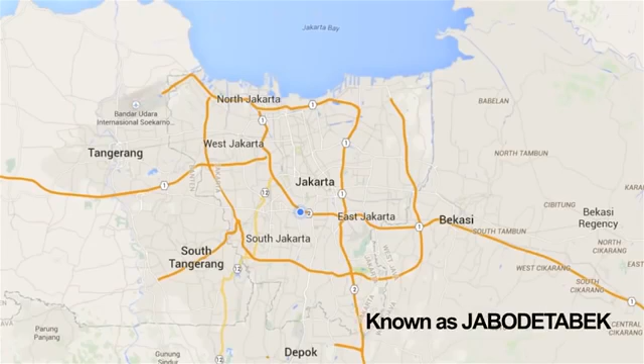Known as Jabodetabek, a name formed by combining the initial syllables of Jakarta, Bogor, Depok, Tangerang, and Bekasi, it is the second largest in the world, yet the metropolis's suburbs still continue beyond it. With 28 million people in the metropolitan area, nearly 10 million vehicles in daily use, and a limited rapid transit system, Jakarta is strained by transportation problems.

The alternative solution to Jakarta's transportation problem shall be providing mass rapid transit that is environmentally friendly and powered by electricity. By adopting the system utilized in other countries such as Singapore and Japan, the Government of DKI Jakarta established the organization that is fully responsible for all activities starting from the engineering service, construction through operations and maintenance. The organization is PT Mass Rapid Transit Jakarta.

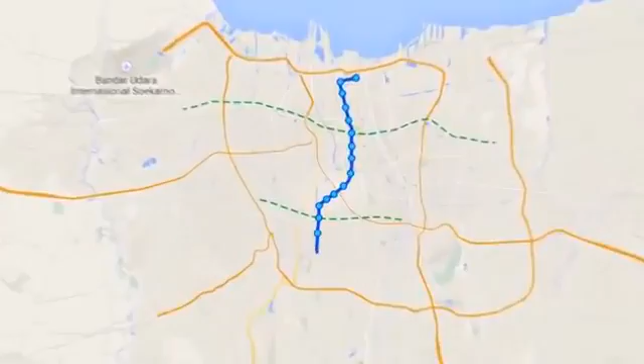Rail-based MRT Jakarta will stretch over 110.8 km of Jakarta roads, consisting of a South-North corridor of about 23.8 km and an East-West corridor of about 87 km. This project is funded through a step loan by JICA and includes the first subway line in Indonesia.

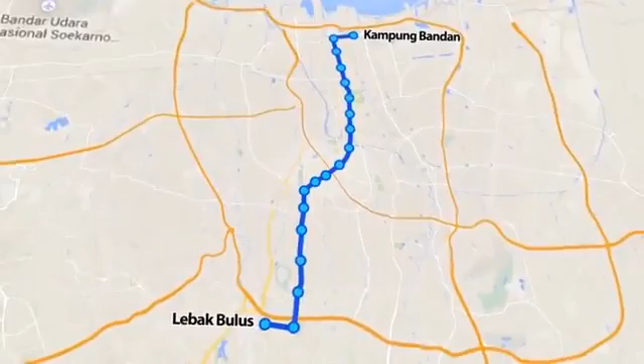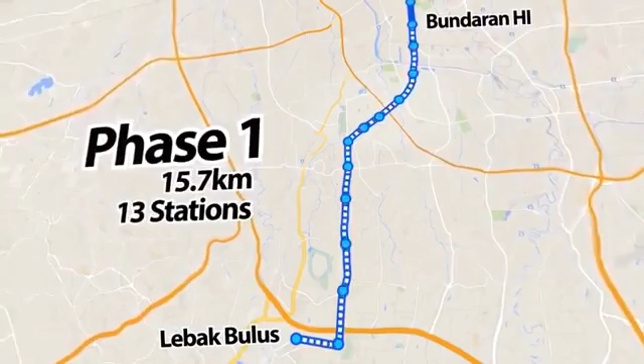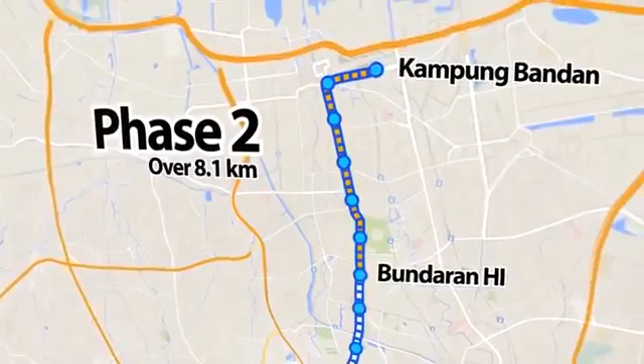The construction of the South-North corridor that stretches from Lebak Bulus to Kampung Bandan will be carried out in 2 phases. Phase 1 will connect Lebak Bulus with Bundaran HI over a 15.7 km railway with 13 stations, 7 elevated stations and 6 underground stations, which is targeted to operate by 2018. Phase 2 will expand the South-North corridor from Bundaran HI to Kampung Bandan over an 8.1 km railway, whose construction will have been initiated before Stage 1 operates.

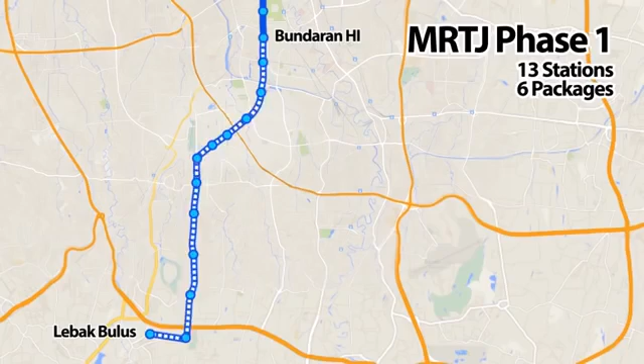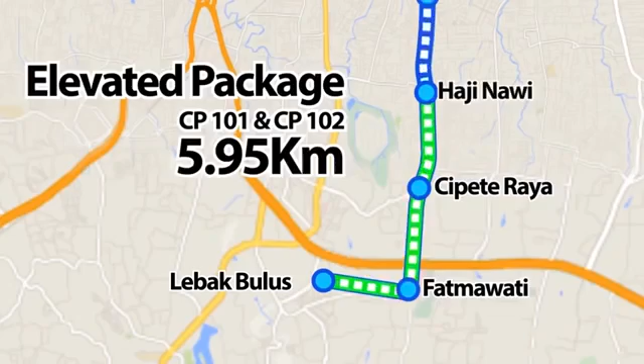The construction of MRT-J Phase 1, which includes 13 stations and 6 packages, has been underway since August 2013. Elevated packages CP101 and CP102 consist of Lebak Bulus, Fatmawati, and Cipete Raya stations along 5.95 km. Elevated package CP103 consists of Haji Nawi, Blok A, Blok M, and Sisingamangaraja stations along 3.84 km.

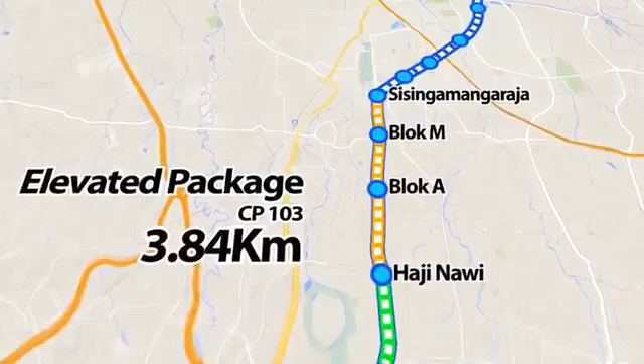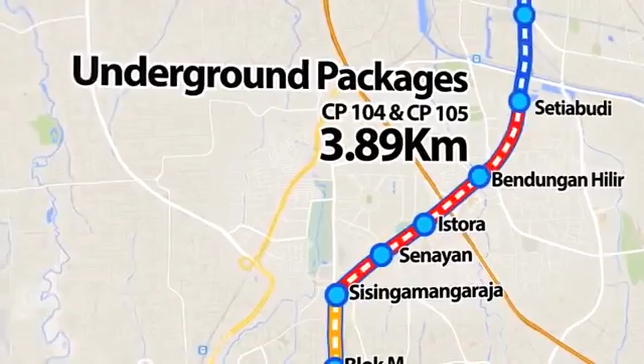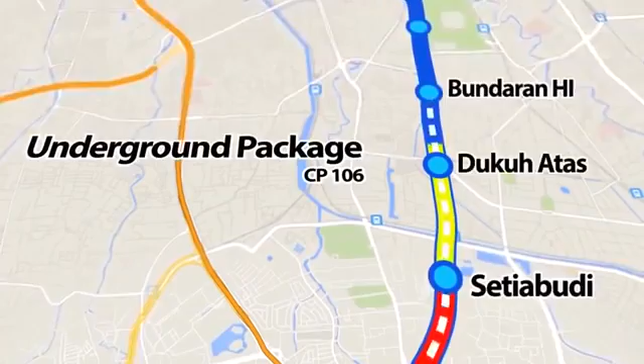Underground packages CP104 and CP105, which consist of the transition area, Senayan, Istora, Bendungan Hilir, and Setiabudi stations along 3.89 km, are carried out by Shimizu Obayashi Corporation from Japan, and Wika and Jaya Konstruksi from Indonesia. Underground package CP106 consists of Dukuh Atas and Bundaran HI stations along 2.02 km.

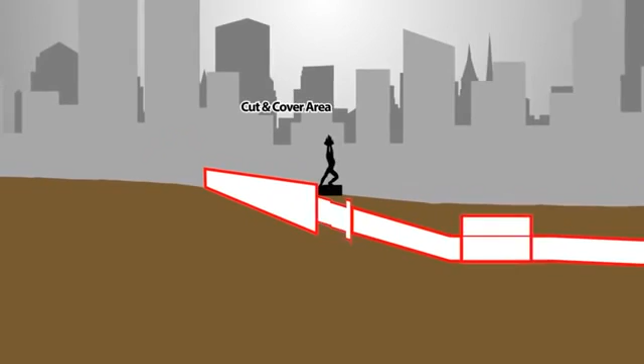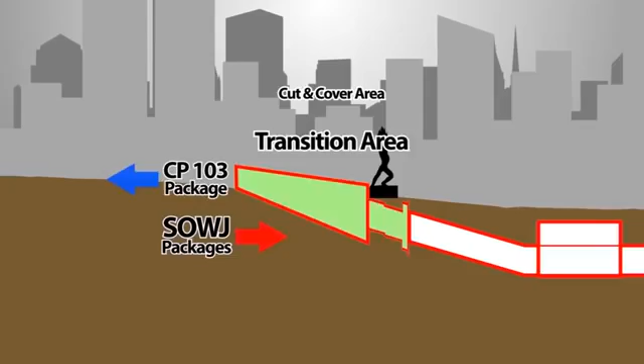SOWJ is the abbreviation of the Shimizu Obayashi Wika and Jaya Konstruksi joint venture, which constructs the CP104 and CP105 packages. Those packages are underground packages that include the transition area, station and tunnel construction with a total length of 3.89 km. The transition area, or cut and cover area, will be located from Sisingamangaraja Road until Bundaran Senayan along 460 meters. This area is a transition from the elevated structure of the CP103 package to the underground structure of the SOWJ packages, which will be constructed by the soldier piling method.

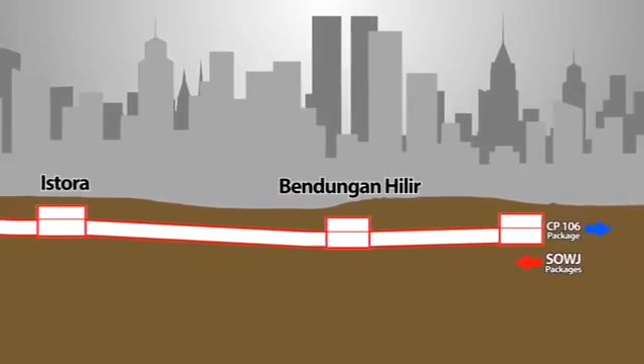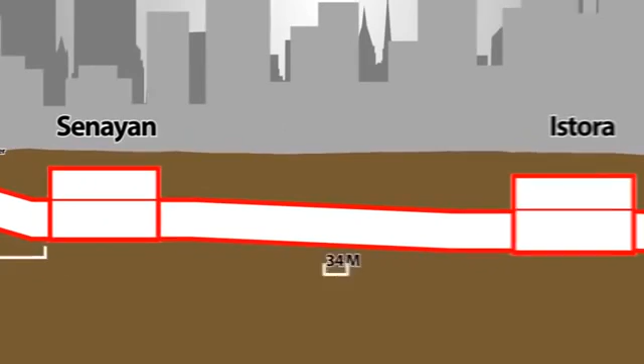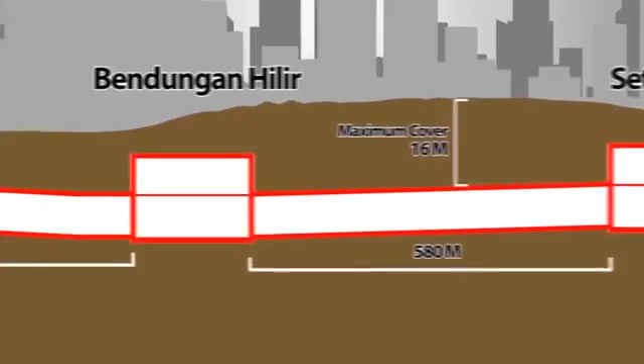There are 4 stations, Senayan, Istora, Bendungan Hilir, and Setiabudi, that will be established. The distance from cut and cover to Senayan station is 322 meters. The distance between Senayan and Istora station is 630 meters. The distance between Istora and Bendungan Hilir is 1080 meters, and from Bendungan Hilir to Setiabudi is 580 meters. The length of each station is 200 meters, except for Istora station, which will be 220 meters.

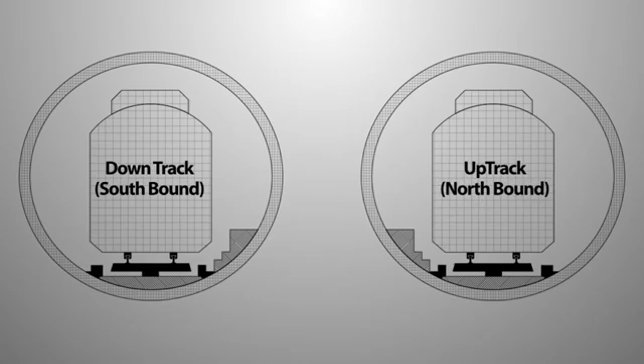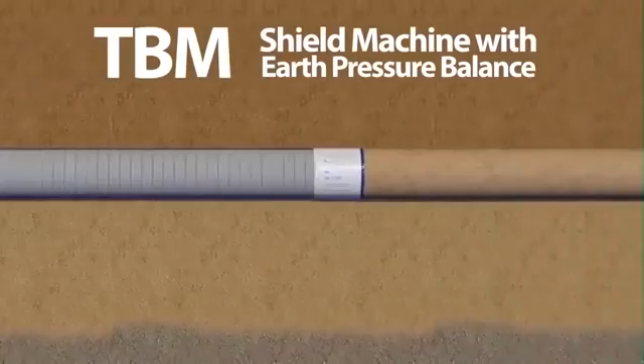The tunnel structure is for the railway of the MRT-J train. The tunnel structure consists of 2 lanes, the down track or southbound lane, and the up track or northbound lane. This facility will be constructed by tunnel boring machine, also known as TBM. The TBM that will be used is a shield machine of the earth pressure balance type. The required inner diameter of the tunnel is 6,050 millimeters. This tunnel is completed by reinforced concrete segments as the supporting lining structure.

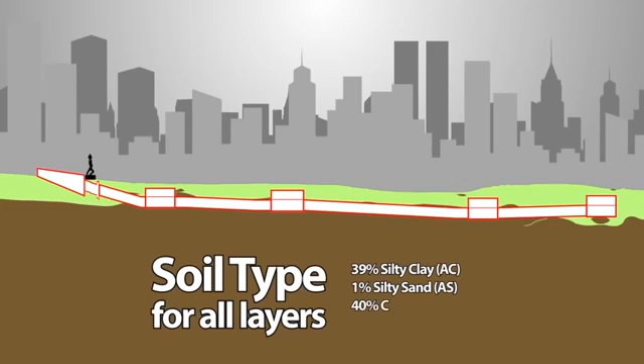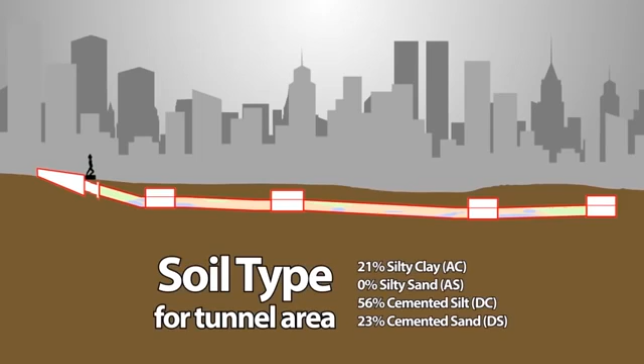According to the geotechnical report for the CP104 and CP105 project location, the tunnel alignment along Jalan Sisingamangaraja through Jalan Sudirman consists of 39% silty clay, 1% silty sand, 40% cemented silt, and 20% cemented sand soil types. This soil condition will affect the type of TBM utilized for this project. The majority soil layer passed through by the TBM is cemented silt. Due to that condition, the type of TBM selected for this project is the earth pressure balance shield machine.

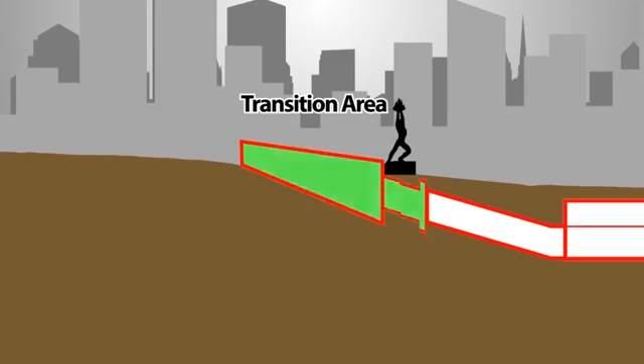The cut and cover area is located in Sisingamangaraja Road, bordering the CP103 package, until the Pemuda statue at Senayan. This area is the transition from elevated structure to underground structure. The cut and cover area is constructed using the soldier piling method. H-beams will be used as the major material of the soldier piles. Before driving the piles, the position, alignment and orientation of the piles must be established.

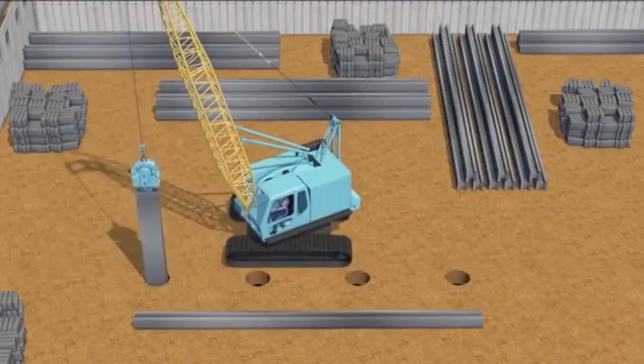Piles will then be driven by a vibrator hammer unit into the marked position. Piles shall be driven in a straight vertical position, otherwise driving will be difficult. All piles will be inspected for excessive camber or sweep. After completing the soldier piles, excavation of the first layer will be carried out, and then a temporary deck and the first waler strut will be installed.

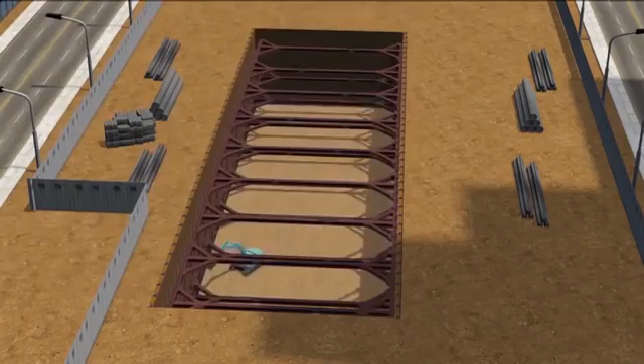Excavation of the second and third layers down to the base will be continued. The bottom layer will be completed with blinding stone and lean concrete. The base slab concreting process can then be started.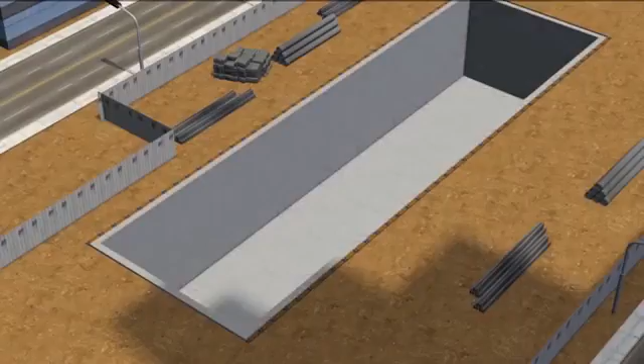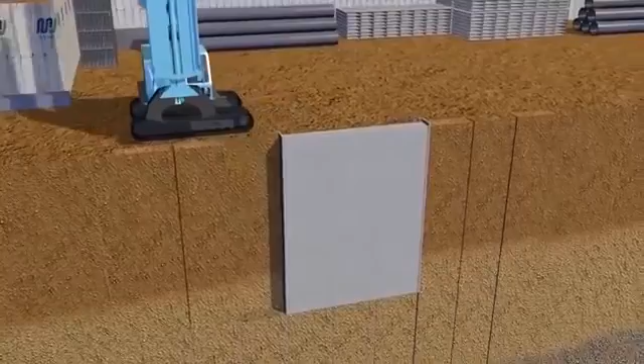The station is constructed using a top-down method. In order to retain the soil and water pressure while commencing a deep underground excavation for main station boxes, diaphragm walls will be constructed. The trench is excavated using a mechanical and hydraulic clamshell, and then a reinforcement bar cage can be lowered down into the excavated area. The next step is pouring the concrete, which is carried out by Tremie method. This cycle is repeated for all 4 sides of the station.

The diaphragm walls will function as temporary retaining walls during construction and also as a permanent retaining wall for the station structures. Before starting the excavation process, king posts must be installed as a temporary support for the roof and floor slabs. The first excavation will be conducted and followed by the casting of roof slabs. With openings around the king posts, the second excavation can be conducted.

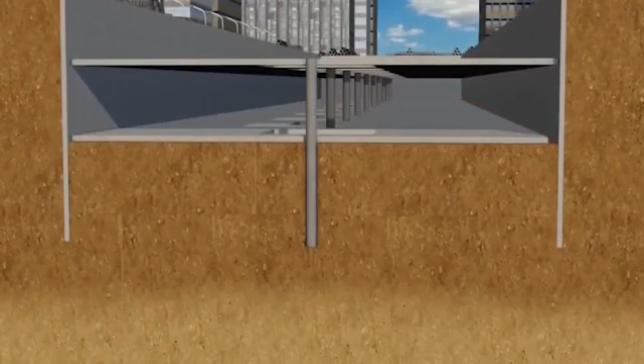After installing the concourse slab, a concourse column will be cast, and then the third excavation can be conducted. Before casting the base slab, blinding stone and lean concrete will be installed. The final process is backfilling the roof slab with soil and compacting it by grader and vibro roller.

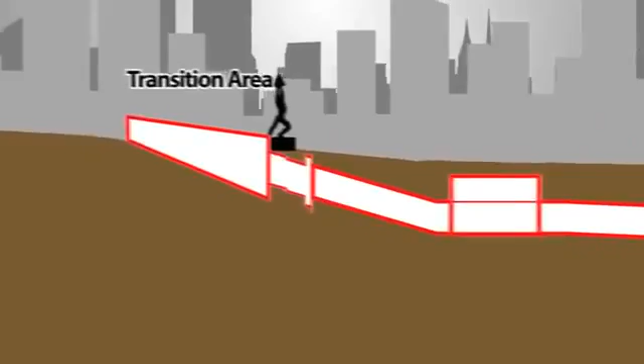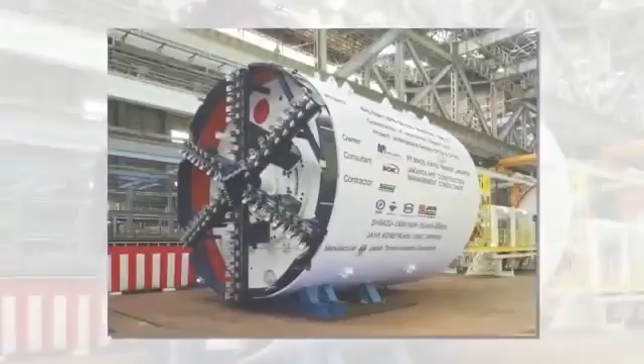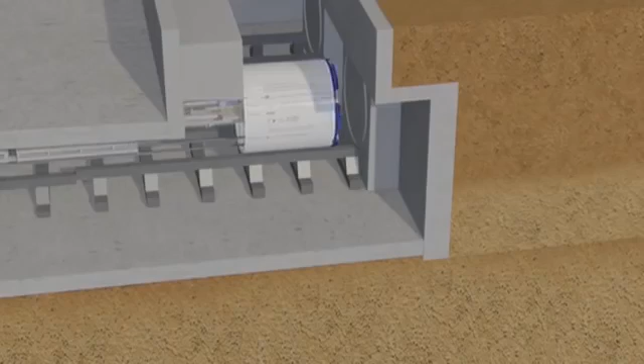The EPB shield machine is not designed as a whole complete component. Shield machine assembly is located at the launching shaft beneath the Pemuda statue, Senayan. This machine is formed by some parts which have special functions for the tunneling work. When the TBM is completely assembled, it will be positioned facing the tunnel eye seal. The TBM will then slowly proceed forward. The tunnel eye will be broken by the TBM roller cutter. The TBM will then break out of the launching shaft and enter into the ground.

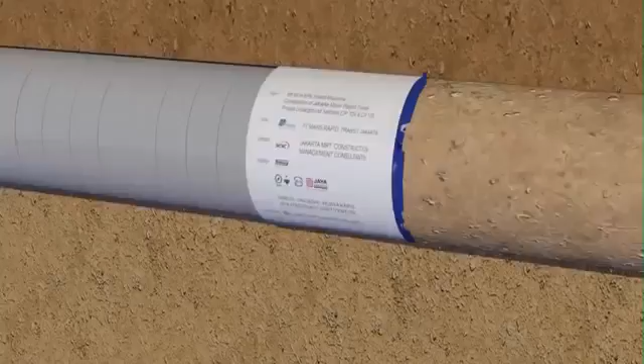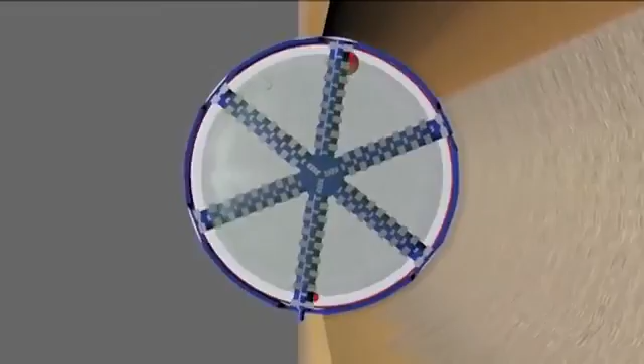The cutter head is the main component for excavating the soil. This project requires a circular spoke-type cutter head structure and flat front shape. To simplify the excavation process, a chemical injection will be required to produce a soil excavation result that is suitable for discharge by the screw conveyor. The chemical will be injected both at the face of the cutting wheel and within the cutting chamber. This chemical will be mixed with excavation material by rotation of the cutting wheel and the mixing arms.

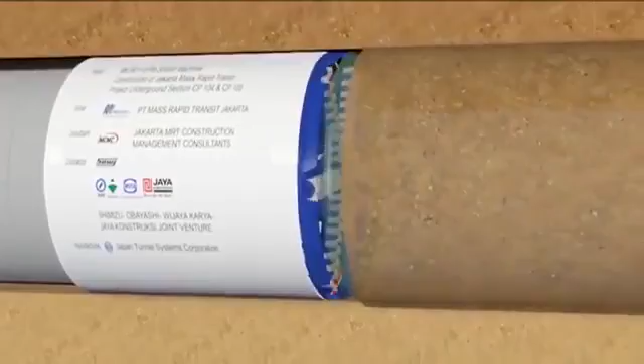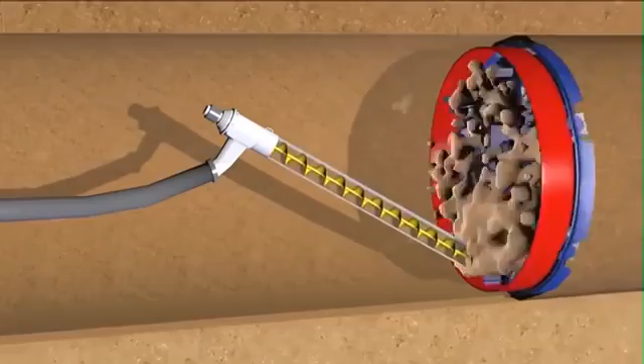After the cutter head rotates to excavate the soil, the soil disposal will be transported to a screw conveyor. The screw conveyor is used to deposit excavated material from the cutter head chamber onto the hose along the backup car. Soil disposal as a result of excavation will be transported from the screw conveyor to the hose system. The screw conveyor has one gate for muck disposal passed into the 14-inch hose. This hose will end at backup car number 1.

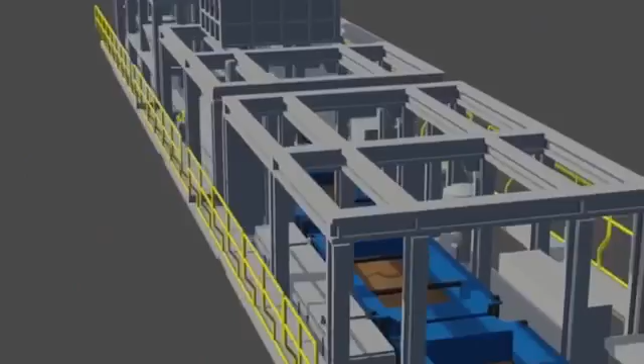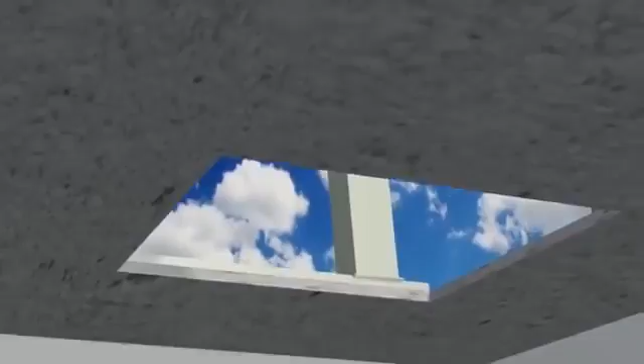Soil disposal from the backup car area will be delivered by muck car to the cut and cover area. The full muck car will be hauled back to the opening by locomotive, hoisted to the surface and emptied into the muck pit. Another locomotive will go back to the TBM carrying the concrete segments and 3 empty muck cars.

After the excavation cycle is complete, the shield jacks are left locked onto the previously built tunnel rings to keep the TBM tied into the tunnel face, and only enough shield jacks will be removed to allow the placement of one tunnel segment at a time. The segment erector can pick up the first segment from the erector pickup area and place it in the correct position in the invert of the tail skin. Each segment is 1.5 meters wide with 25 centimeters thickness.

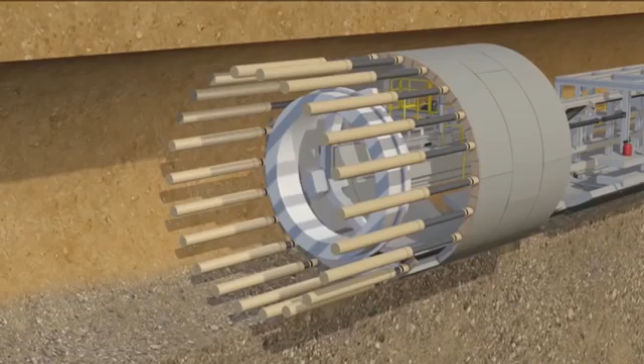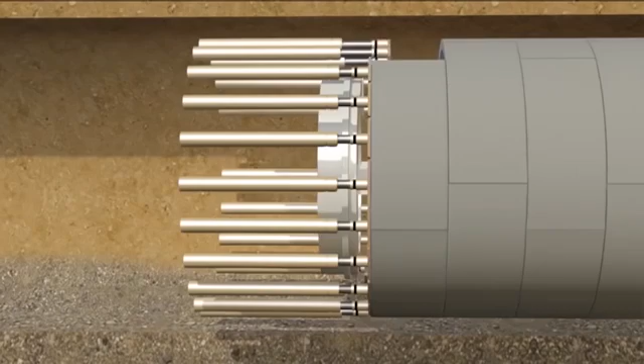The segment hoist is then operated to place the remaining segments into the erector pickup area. The ring build is completed by inserting the key segment and tightening all the segment bolts. After the 6 segments have been installed properly, the shield jacks will then push forward and the excavation will continue.

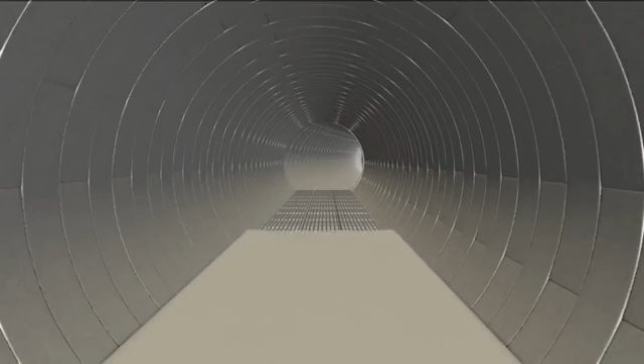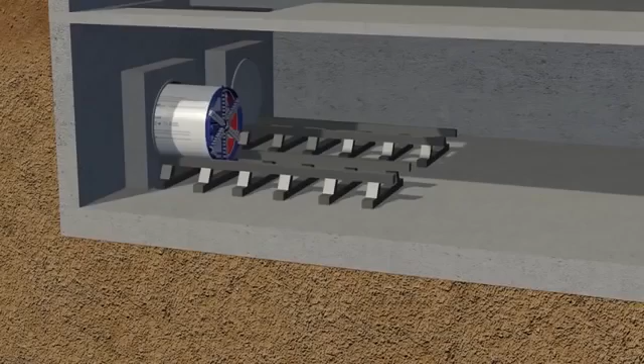The tunnel is finished by installing a concrete invert, which is a permanent structure for the track bed of the MRTJ railway. When the machine has reached a designated distance, the machine will arrive at stations. The final arrival is at Setiabudi station. And then the machine can be dismantled. One by one, the machine parts will be hoisted up to the surface.

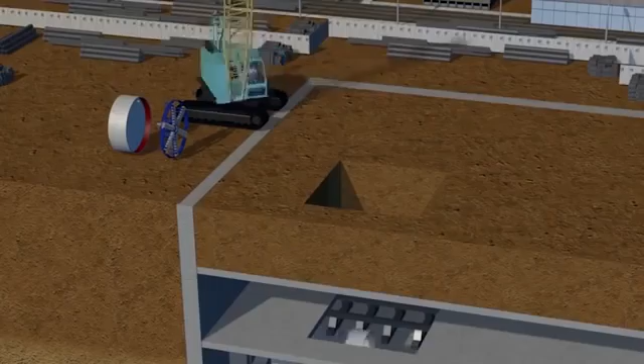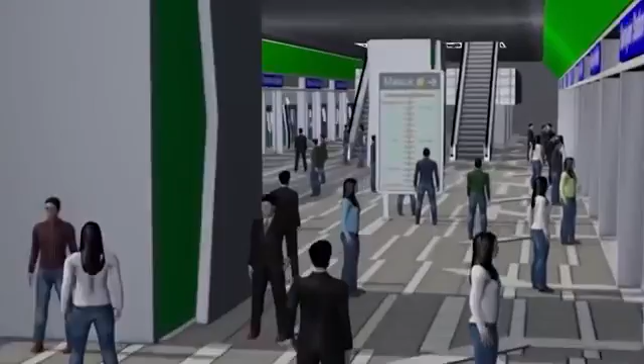After completing the station and tunnel structure, the next step is to install all the mechanical and electrical components, including architectural works. All stations' entrances and exits will be located at the pedestrian area for easy access for MRT Jakarta passengers. MRT Jakarta Phase 1 is expected to carry 412,700 passengers each day. Travel time between Lebak Bulus Station and Bundaran HI Station is only 30 minutes with 5 minutes headway.

This indicates that the target of this operation is for MRT Jakarta to be the primary alternative of public transportation. The final impact of MRT Jakarta will be to reduce the level of traffic jams and pollution in Jakarta. Comfortable and safe travel will be experienced by Jakarta citizens with this MRT Jakarta operation.